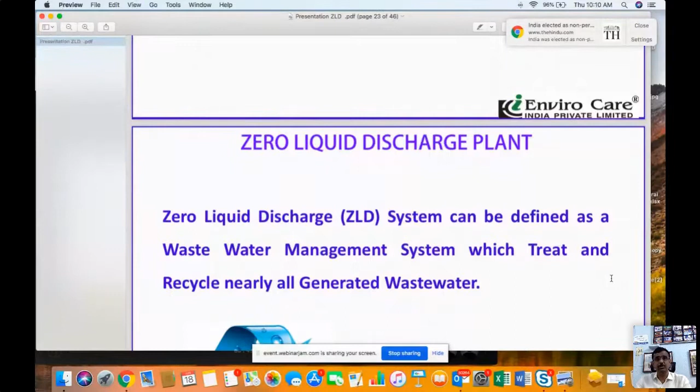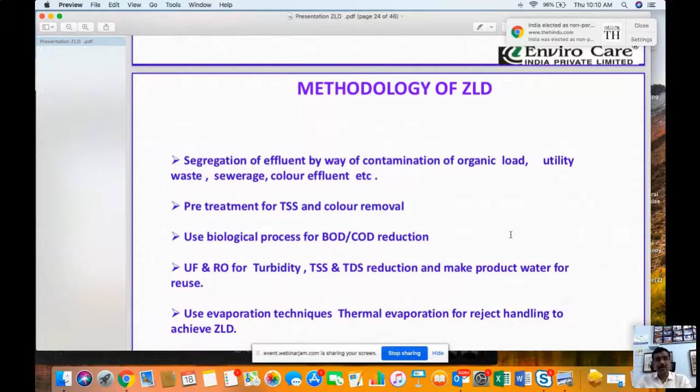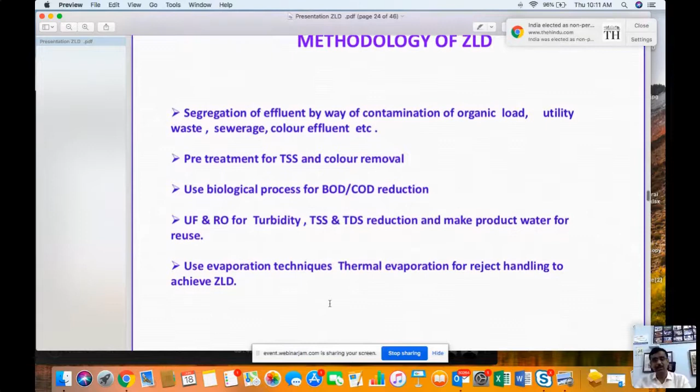This is the methodology of zero liquid discharge system. Segregation of effluent by way of contamination of organic load, pre-treatment, removing of total suspended solids, color, and the biological process, BOD, COD reduction. And by using ultrafiltration and reverse osmosis technology, TDS reduction will be happening. Finally, by evaporation techniques, we can achieve zero liquid discharge.

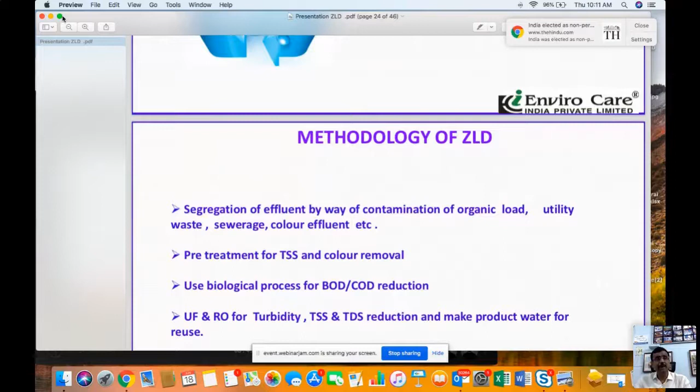So the main thing is, input is wastewater, any trade effluent. The output will be treated effluent, which will be used for process, and you will get a salt. Sludge will come out as a salt. You will get water and salt. Salt will be stored and sent to the common disposal facility for disposal, and the water will be recycled and reused in the process.

Nowadays, in the context of Tamil Nadu, getting groundwater from our own borewell is restricted. Recently, you would have seen the notice given by the Tamil Nadu government for closure of all the mineral water plants which are withdrawing water from the ground.

You may be having your own borewell, own land, but for withdrawal of water, you need to get permission from the Government of India as per the norms. So the government is trying to reduce water consumption.

What is the advantage of zero liquid discharge? For example, one company is using 1 lakh liters per day. For 30 days, 30 lakh liters of water is consumed. If you take 1 year, almost 3.6 crore liters of water, that is 36 million liters of water consumed per year.

If you have zero liquid discharge technology, I am very confident that you will recover 90% of the wastewater generated. Taking the lowest, approximately 30 million liters of water can be recycled and reused in the process, and you will be withdrawing only 6 million liters per year for an industry using 1 lakh liters. So this is one way we are conserving water.

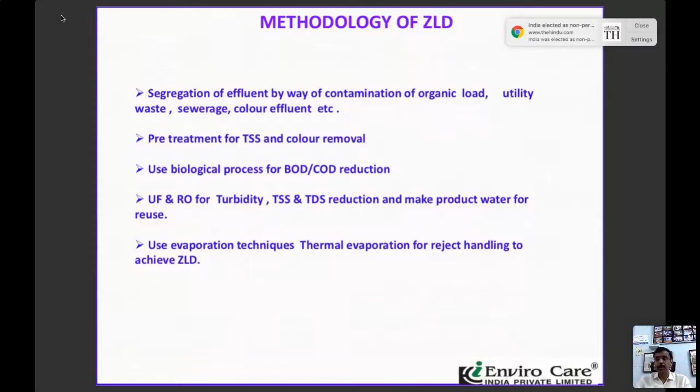That is why the Tamil Nadu government has given instructions to many Ambur, Vaniyambadi tanneries and Tirupur textile industries, wherever effluent is generated - whether from textile, sugar, or power - zero liquid discharge system is required. Coming to the case study, instead of talking about so much technology, since we are in the industry, I wanted to take one industry where we have implemented this project: textile industry.

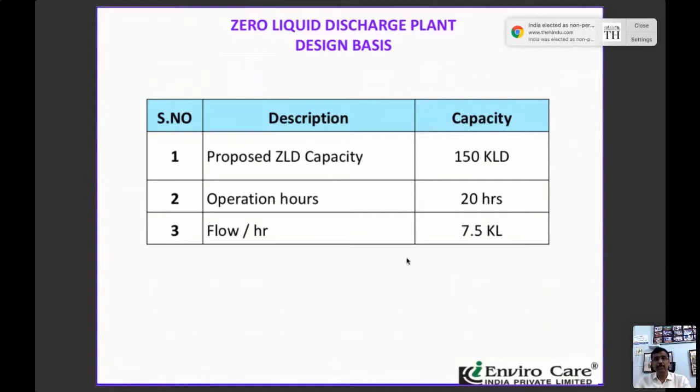For this textile industry, the proposed ZLD capacity is 150 kiloliters per day. Operation hours is 20 hours. The flow is 7.5 kL.

Whenever you design a ZLD project, you need to consider two important things: quantity and quality. These two determine the system. When you design for 150 KL, if you supply 250 or 300 KL, you cannot run the plant - it will be overloaded. If you send only 50 KL instead of 150 KL, you will be underutilizing the plant. Both things will affect plant efficiency.

The second most important thing is quality. The plant should be designed for a particular quality - pH, TSS, BOD, chemical oxygen demand, dissolved solids. Apart from this, so many parameters are there, that would be a lengthy lecture, but I am taking the main parameters to be considered in the design of ZLD for any textile processing effluent: total TSS, BOD, COD, TDS, all these things.

Generally the textile effluent will have these characteristics. The main problem with the textile industry is the TDS - here I have put 2500, sometimes ordinary raw effluent may go up to 4000 milligrams per liter. I've taken a low value here because this type of industry is generating less, but generally it's 4000 milligrams per liter. TDS is very, very important. For any drinking water, the normal TDS level is 500. For mineral water plants, the TDS of water supplied is equal to 50 or 60 milligrams per liter. So when it is 4000 milligrams per liter - in many places wherever industries are more, if you test the existing groundwater quality, the TDS is around 3000 or 4000 because of the indiscriminate discharge of effluent into the ground.

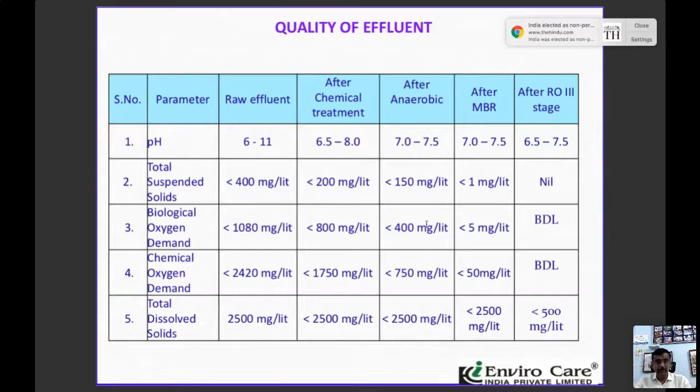Part 2 is ultrafiltration and RO plant. The purpose of both is to remove very fine suspended solids, and also predominantly TDS. After that, the last one is evaporation technology. Evaporation will segregate the reject effluent into two things: one is distilled water and another one is salt. So these are the three stages or phases involved in the ZLD.

The effluent is sent to equalization where all the wastewater is collected and equalized. Then it is taken to the primary clarifier, adding chemical dosing based on lime, alum, and polyelectrolytes, which will be added based on the quality of the effluent - the dosing system will be adjusted. When it passes through the primary clarifier, the purpose of the primary clarifier is to remove the suspended solids.

And we have upflow anaerobic sludge blanket reactor. This is an anaerobic system by which you can reduce the COD and BOD to some extent. When the COD and BOD is more, aeration is very important. When BOD is more, we need to have an upflow anaerobic sludge blanket reactor, an anaerobic system, followed by an aerobic system, which is important for any treatment system. So this is the basic system which I wanted to explain.

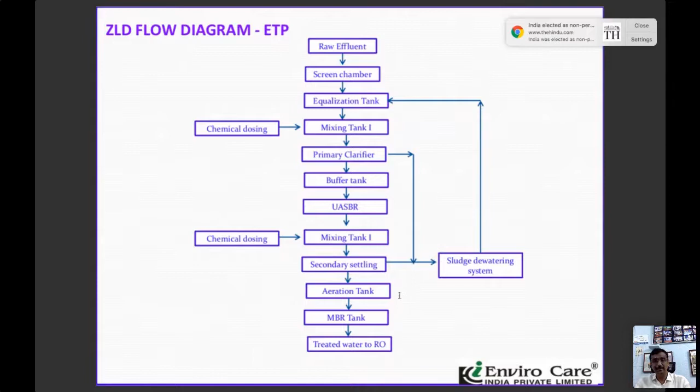Generally, we have designed this system. This company is a German-based company, and they wanted to put up a plant. I do not want to mention the name of the plant, but they wanted to put up a plant in Tamil Nadu. So we have designed this system, and finally a sludge dewatering system. Whatever sludge is generated from the clarifier mechanism will be taken to the filter press.

I think the first one is ETP, the second one is about the RO plant. RO plant, we have 3 stages: ultrafiltration - here we have not considered ultrafiltration because already we have given membrane bioreactor technology. There are 3 stages of RO plant: stage 1, stage 2, stage 3, and you will get a final reject, followed by mechanical evaporator and other things. Second phase and third phase are explained.

Here, the input RO feed quantity will be 150 kiloliters. You will get the TDS input as 2500. Totally, when it is passing through the first stage, second stage, and third stage, finally when it is put together from the RO plant, the permeate will be 136.35 kL. So out of 150, you are able to recover almost 90%, almost 91% of water.

The very important point you should note is the TDS will be less than 500 milligrams per liter. The raw effluent TDS initially was 2500. Now it has come down to less than 500 - it may be 100 or 250 or 300. So you are able to recover 136.35 KLD of treated water, with TDS less than that. This is as good as drinking water. You can very well use it for your entire process.

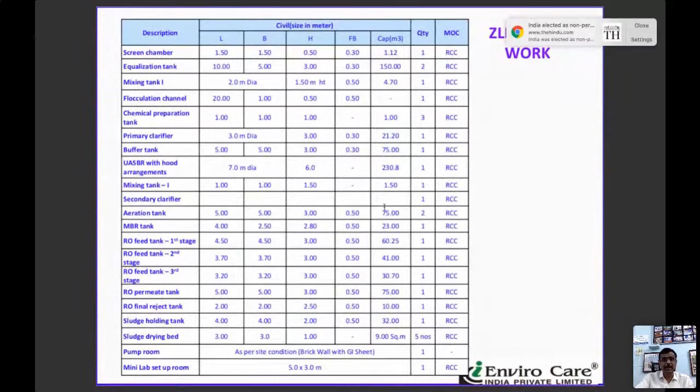And these are some of the tanks, maybe these are the tanks which will be constructed for the implementation of this project. This is the process flow diagram. Pre-treatment, screening, chemical treatment, anaerobic treatment, chemical treatment - I was mentioning about the first phase.

First phase is collection tank. This is how the effluent is coming, and these are the tank units involved.

Pre-treatment involves removal of chemicals or suspended solids in this process. Removal of BOD, COD is happening in this tank. Then anaerobic treatment, upflow anaerobic, for further removal of whatever chemical impurities were not removed in the primary process, will be removed in the secondary process.

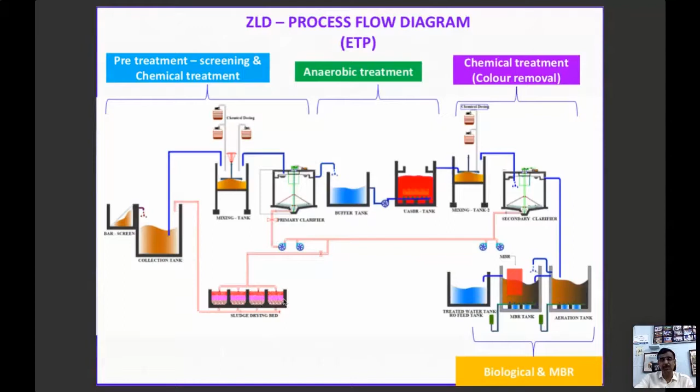Finally you will have an MBR which will remove the very fine suspended solids. So these are the three things involved in this particular textile industry. This is a sludge drying bed. Whatever sludge comes out will be dried in the sludge drying bed, followed by filter press.

Second phase is RO plant 1, 2, 3 - three stages of RO plant. I do not want to go in depth about the RO plant. I am just telling you the purpose of the RO plant is to reduce or remove the total dissolved solids from the wastewater.

The third one is double stage evaporator followed by agitator. These are the evaporation technology - double stage evaporator, and there's also single stage. This is a double stage. Based on the quantity, we will design the two-stage evaporator.

In this, how is it getting evaporated? Input is wastewater and steam. Steam from the boiler is necessary for evaporating this. You will get the output - one is water.

Input is steam and highly reject effluent. Output is clear water which can be used for process, and also reject water which will be taken to the agitated thin film dryer, ATFD.

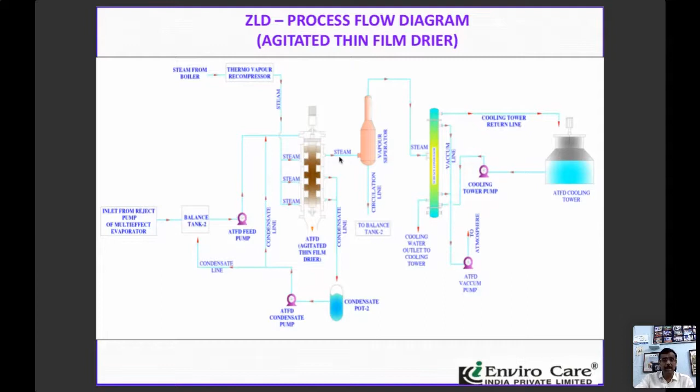In the ATFD, the highly reject or concentrate effluent from the evaporator will be sent to the agitated thin film dryer. From the dryer, it will be segregated into salt and treated water. So this is what is happening - these are the hydraulic flow diagrams related to the pre-treatment.

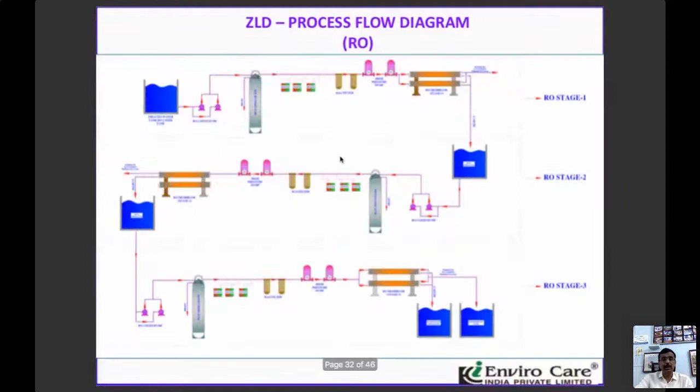And the RO plant and the evaporator, agitated thin film technology. Now coming back, I'll go back to the implementation process.

Is it visible, sir? Okay, yes sir, yes sir. Okay, one second. I'm connecting with the slides. I'm not able to see the slides. One second.

This is the zero liquid discharge system, ETP. I was mentioning about the ETP, how the ETP looks like. This is the plant, this is another plant, but the ETP will look like that only.

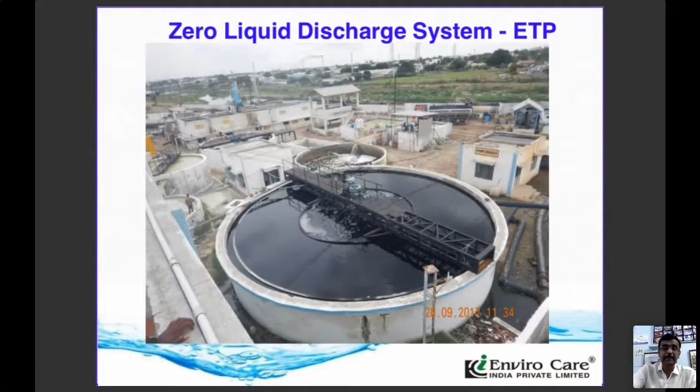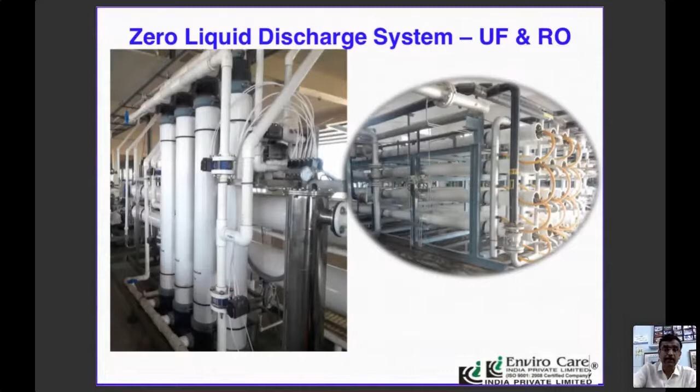This is a raking arm system, and these are the parts of ETP. Coming to the second system, ultrafiltration - sometimes people prefer it, the company may prefer UF or may not prefer it. This is called ultrafiltration and RO plant.

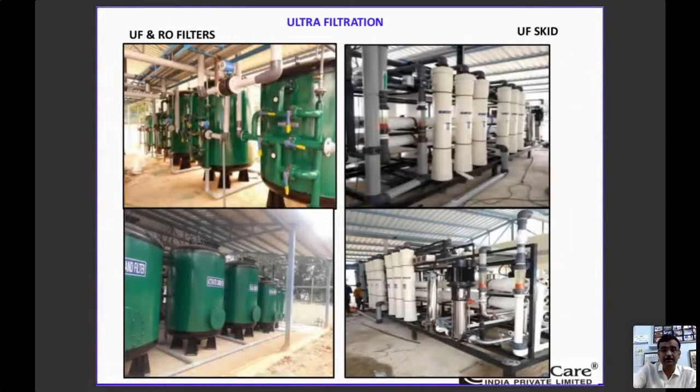This is a project which we have implemented. This is also an RO plant. And a very important thing is the mechanical evaporator.

Mechanical evaporator - the total height will be around 50 feet from the ground level. You can see the evaporator. This is made of SS316.

All wetted parts will be SS316. All the other parts will be SS304. And you can see the ground floor, first floor, second floor, third floor. Again on the third floor, you can see the height.

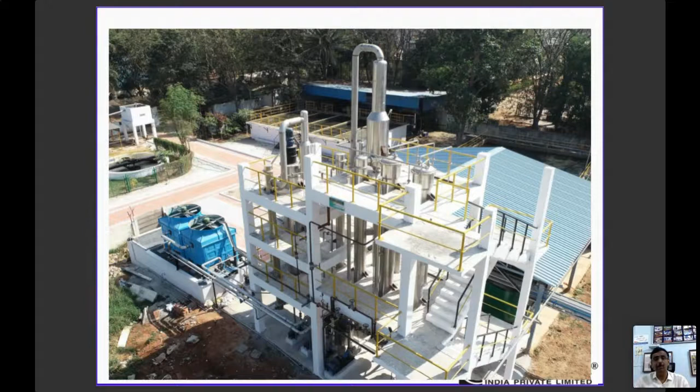So there are two - this is a two-stage evaporator. The falling one is falling film, the other one is forced circulation. As I have mentioned, the steam is input and the reject is input, and you will get the salt and treated water in other things.

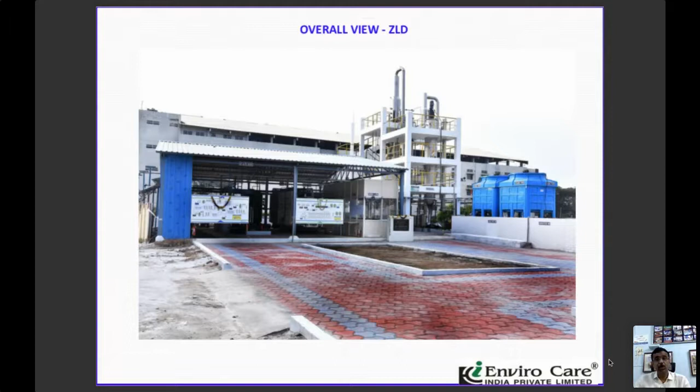This is the overall plant - a combination where the ETP is not here, just RO and evaporator. And this is the arrangement by which you will get the salt from the particular plant.

Are you able to see the slides, sir? I am not getting it. No, sir, the screen is fully white. Wait, I'll check. If that imagery is high capacity, it will take some time, I think. Okay, now I think you can see it.

This is a multi-stage evaporator. Just go down on the image. Now you can see the slides - multi-stage evaporator, cooling tower, UF and RO shed with the mini lab. This is the overall top view of the plant.

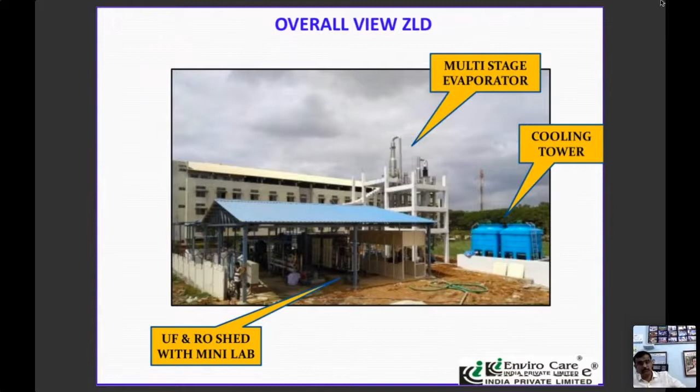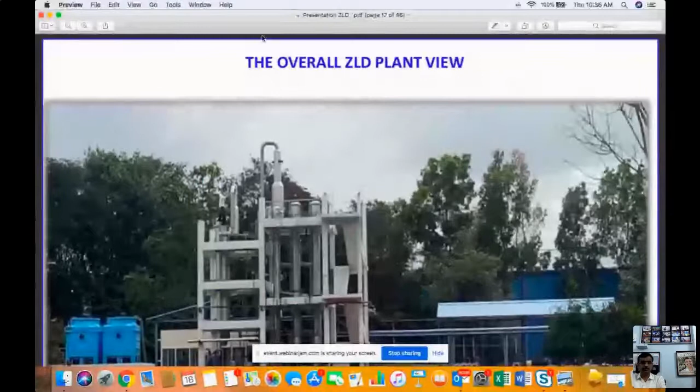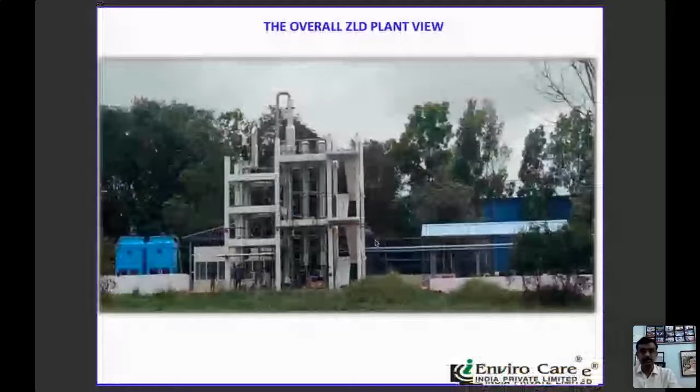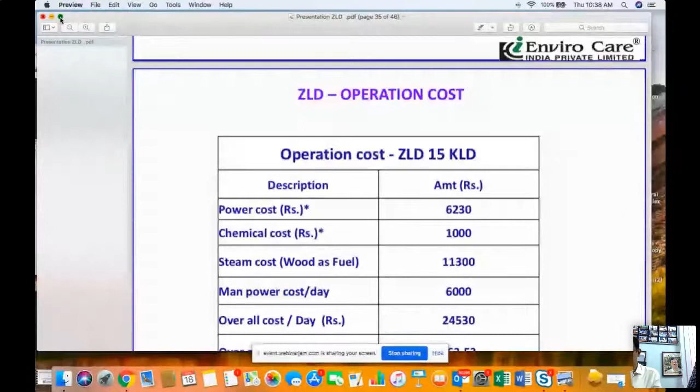Hello. Hello, hello. Yes, sir. Yes, sir.

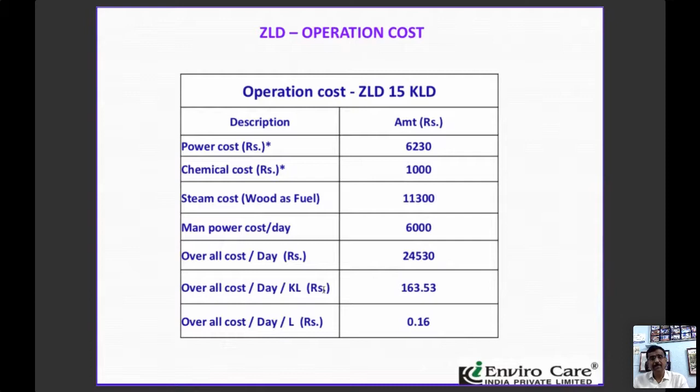Initially, 10 years back it was 2 rupees, then 1.50, then 1 rupee. Now people are running the evaporator with 30 paise, 25 paise. We can run this type of plant with 16 paise per liter. So this is a very important aspect, and I think I have covered some of the important points, maybe slides, the photos and other things. We are not able to move that. So with these few slides,